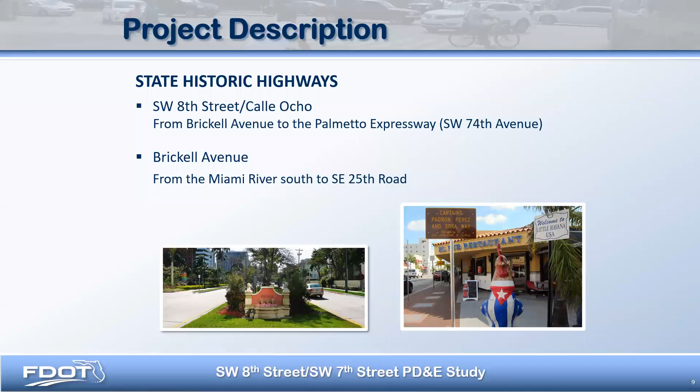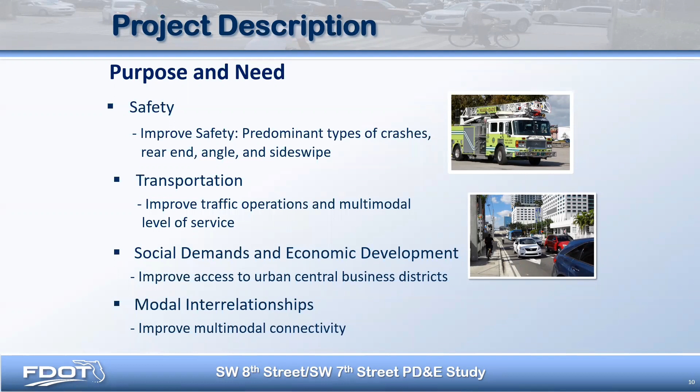So we evaluated several alternatives along the corridor along 7th and 8th. We focused on the arterial alternatives before the I-95, for obvious reasons - anything that happens on the arterial has an impact on access to I-95. So we evaluated a no-build alternative, transportation systems management and operations, and 8 build alternatives. Alternatives 1, 2, 2A, and 3 removed a travel lane for different purposes.

We looked at alternative 1, for example, a two-way in which both 7th and 8th Street will be converted to two-way traffic with one center travel lane, one center turn lane, dual turn lane. Alternative 2 was also two-way traffic on both 7th and 8th.

However, the third travel lane was evaluated as a transit-only lane. Alternative 2A, again, a two-way, but that third lane was repurposed for a buffer bike lane. Alternative 3 was a two-lane, however, it's a one-way alternative, so it maintains the existing one-way pairs. However, the third travel lane was being repurposed for a bicycle lane.

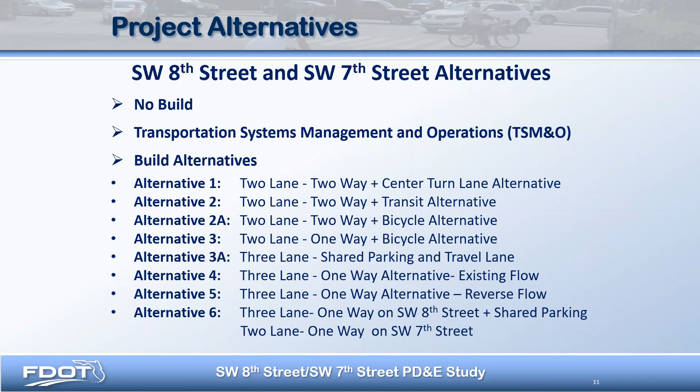Alternative 4 maintains the existing configuration with 3 lanes eastbound on 8th Street and 3 lanes westbound on 7th Street. It does, however, include improvements at I-95. So there are no impacts along 8th Street, as we'll be maintaining the existing configuration.

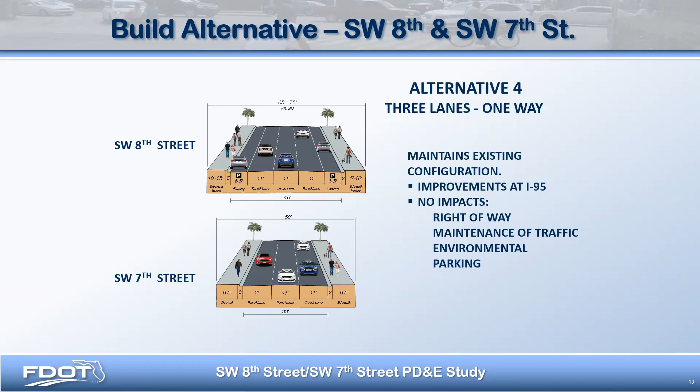While we have certainly more on 8th Street, we have approximately 25 to 30% canopy coverage along the street. 7th Street is more limiting because the sidewalk and right-of-way are more restrictive, but we do have some canopy there that we're at least able to preserve. When we get to the Brickell slide, the interchange slide, we'll talk about that.

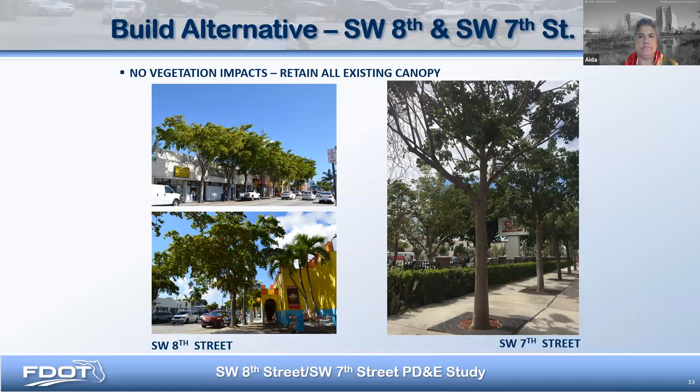Once we had a preferred alternative for the arterial, we focused on the I-95 alternative, evaluating the no-build and build alternatives. The build alternatives are a combination of elements. For example, alternative B1 looked at an elevated off-ramp as well as an elevated on-ramp. Alternative B2 looked only at the on-ramp, and alternative B3 evaluated only the off-ramp. Alternatives B1 and B3 were determined non-viable due to constraints and the geometry for the off-ramp.

As you all know, that area is very urban, there's not a lot of right-of-way, so there were geometric concerns with the off-ramp and the ability to provide enough sight distance.

Alternative B4 was an at-grade solution that converted 3rd Avenue to one-way, to facilitate access to the on-ramps at Southwest 8th Street.

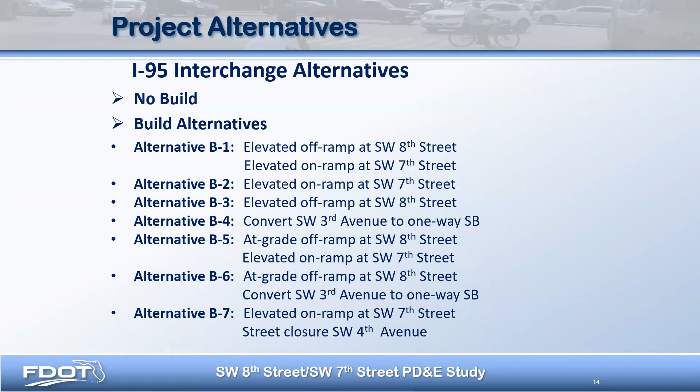So this is the preferred alternative for the project. As I mentioned, it includes that elevated on-ramp from westbound 7th Street to northbound I-95. It also includes the widening of the I-95 southbound off-ramp and closure of Southwest 4th Avenue at 7th Street. Southwest 4th Avenue is a City of Miami jurisdiction, so we did extensive coordination with the City of Miami, as well as Miami-Dade Department of Transportation and Public Works, and they have both provided a letter of support for the closure of 4th Avenue. This alternative also includes converting 4th Avenue and 3rd Avenue to two-way between 6th Street and 7th Street, to facilitate access to the I-95 on-ramps at 8th Street and 7th Street.

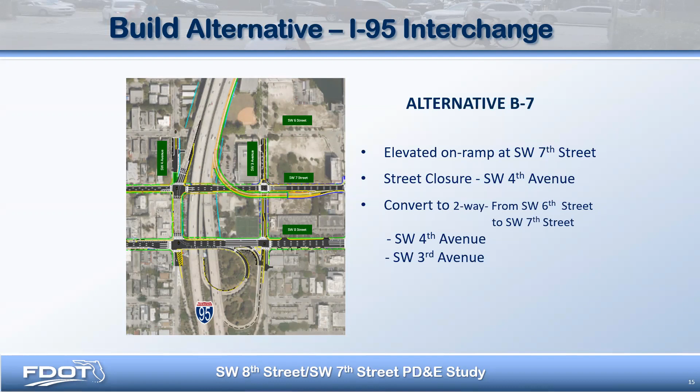Next slide. Thank you, Vilma. As Vilma stated, with the limited right-of-way and limited options, one of the wonderful benefits for the project is that there will be very minimal vegetation impact. These interchanges and ramps are very densely vegetated, so we will be able to maintain as much of the canopy as possible. The clearances may require maybe 1 or 2 trees, depending on the clear zones, but that will be determined in the final engineering plans. Thank you.

Next slide. This is showing a rendering of the proposed on-ramp. We'll be providing sidewalks on both sides - there's existing sidewalk on the north side, and we'll be providing sidewalk as well on the south side. Next slide.

In terms of the project schedule, we're looking to hold a public hearing in November of this year. We'll also cover the State Historic Highway designation, as well as present the closure of Southwest 4th Avenue. We anticipate location and design concept acceptance in May of next year, and design to begin in late December of '22.

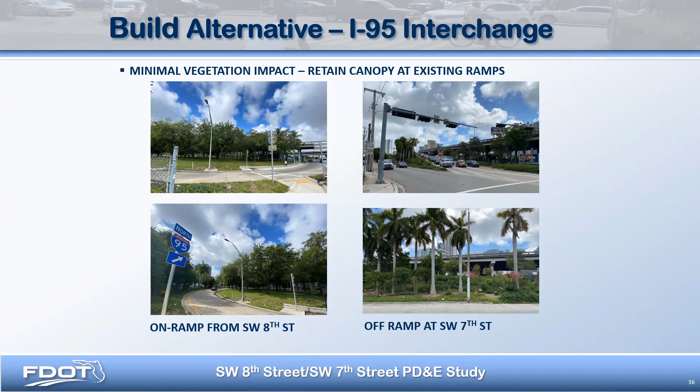So is that Publix on the right there? It looks that way, yes. Okay, the orange building, that's Publix. And the new sidewalk is across the street. Correct. Okay, that's a vacant property right now.

Right, so actually Steve made me think about something. There's always been talk about making these roads two-way instead of just a one-way pair. So this new ramp would almost preclude that from happening. Is that correct?

Well, we did look at all those build alternatives. As I mentioned before, we looked at the two-way, we looked at the reverse. A lot of the stakeholders, both business owners and residents, saw that turning it into two-way would pretty much require reconstruction. And at the end of the day, they didn't really see a benefit in terms of their business or the residents. So to convert it to two-way would require new signalization and, again, a lot of reconstruction for what was in their eyes not seeing as any additional benefit.

Right, it's good urbanism to do. Yeah, so anyway, all right. Any other questions or comments? I have a quick question for Ada Curtis.

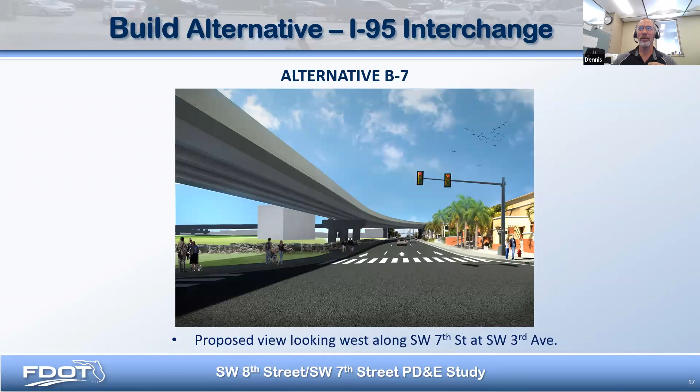Okay, anything else? I just wanted to ask if you could hear me, if I got my mute fixed. You're fine. Oh yeah, perfect. Thank you for that. David, can you hear me? Yes. Yep, okay.

It's been difficult to absorb the project because on the one hand, I'm looking for a Southwest 8th Street improvement all the way from Brickell to the Palmetto. So the title or something is extremely confusing. And then bottom line, we're looking at a ramp. So I feel either the title of the project should be changed or we should see the entire project. We're just being given a very narrow little scope of, this is what we're doing here.

So I don't know, is there something in the project in its totality that we're not seeing, or is it coming to us later? Isn't this just the one-way portion of 8th Street and 7th Street?

The study did look at alternatives along 7th and 8th between 27th and Brickell. However, after evaluating 8 built alternatives, it was recommended to maintain the existing configuration. The study did evaluate the entire corridor, but the proposed improvements are just at the I-95 interchange. When the project moves to design, it will focus just on the interchange, so there are no proposed improvements along the arterial at this time. The reference to the Palmetto was about what's designated historic, not the entire study area, which is limited to 27th Avenue to Brickell.

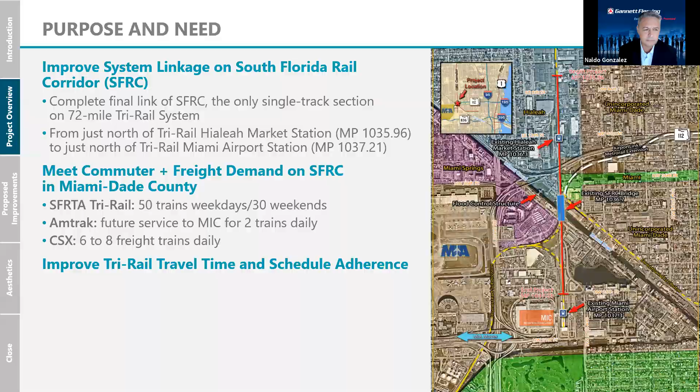The third item is to improve travel time for Tri-Rail and schedule adherence for CSX. Next slide — you can see the map there.

The last part is intermodal connectivity, at the Miami station at the far south end of the job, which is the Miami Airport station of Tri-Rail. It provides connection to Miami-Dade Transit buses, the Metro Rail, and the Greyhound. Eventually Amtrak will also go down to the Miami station, and of course it connects to Miami International Airport.

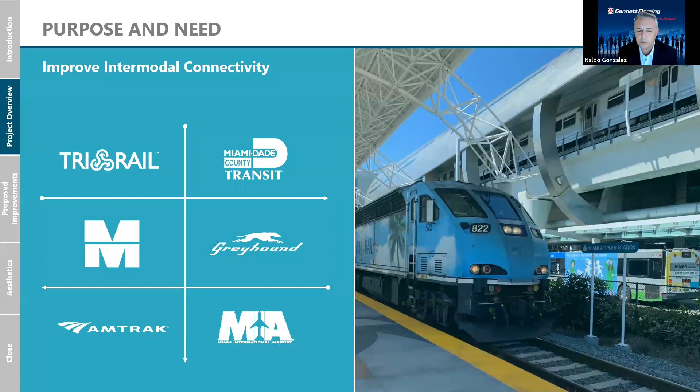Next slide. The existing corridor is a single track. It goes from just north of the Miami station, around Northwest 28th Street, to just north of Northwest 46th Street, in the area of Hialeah. The right-of-way is about 50 to 80 feet, and the land use area is predominantly industrial.

Have you ever been out there? There are seven crossings along the project limits — two spurs, the downtown and the Homestead, mainly for CSX, and two historic sidings that provide direct rail access connections to two properties along the corridor.

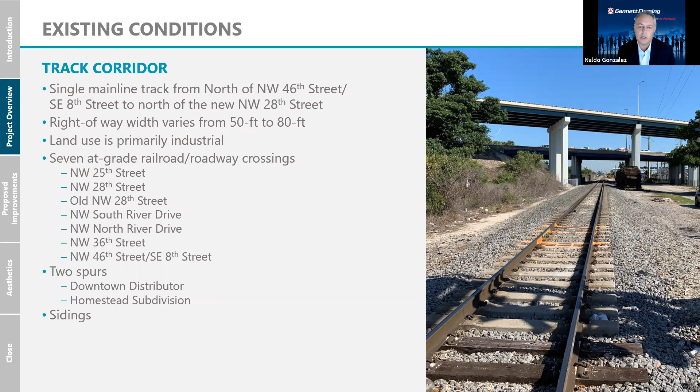Next slide. These are some other existing conditions we're contending with. The existing Hialeah Market Station, which will be improved, is just south of the Hialeah Seaboard Air Line Railway Station — the original station, just north of the existing one, which is historic. We won't be touching it, but you should be aware of that constraint.

The other constraint is the river crossing — a single bascule bridge, which I'll speak to further. It's eligible for listing on the National Register of Historic Places, and openings are very limited; there's no boat traffic out there, but they do open it for maintenance. We also have a couple of overhead structures, including Northwest 36th Street and State Road 112, the Airport Expressway, and the Metro Rail at the Earlington Heights leg, which was constructed a few years ago. Next slide.

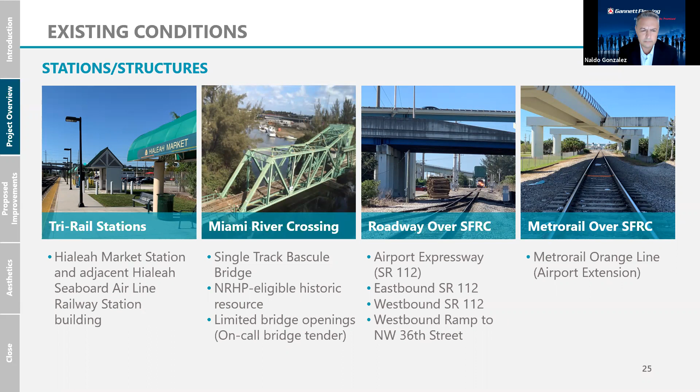The main issues on the job, when we looked at it from a design standpoint after taking over the project from PD&E, fall into three buckets. The first and biggest hurdle was navigational rights. That portion of the Miami River is dedicated for navigation through a federal project canal, and in order to get a fixed bridge we needed a deauthorization — that required literally an act of Congress, which we were successful in getting back in December. Working with SFRTA and FDOT, we got the US Congress to pass a bill that included the deauthorization of that portion of the canal, allowing us to proceed with a fixed bridge.

It requires some coordination with some permitting agencies, and we do need to compensate the property owners for riparian rights. The second bucket of items we deal with is capacity improvements, the replacement of the bridge.

How do we do that? How do we maintain traffic? The special track work, the signals are being upgraded. The PTC, positive train control safety features, we're improving it. And then the maintenance, how do we maintain traffic for CSX and Tri-Rail while we're building this thing? And of course, safety and security is important on the job as well, which is part of our scope.

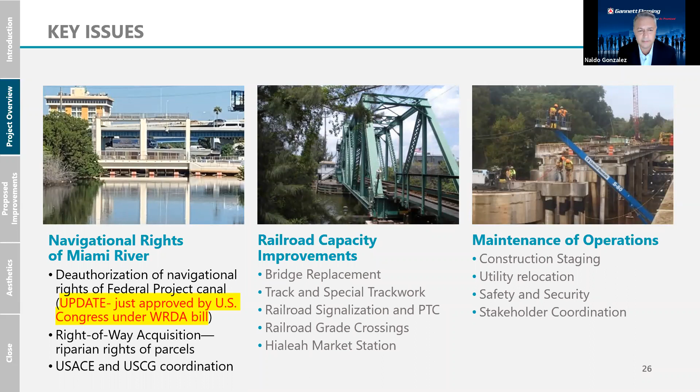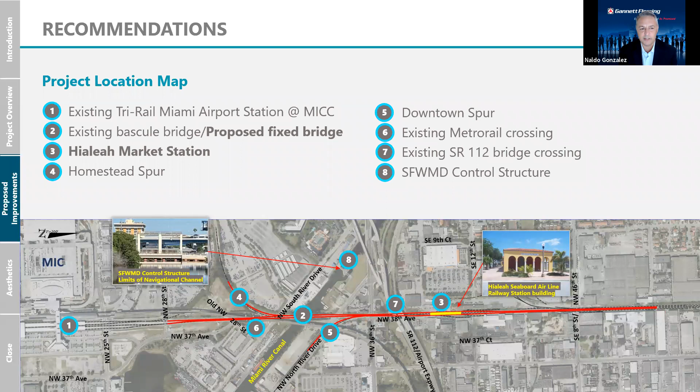Like Minot said, there was a PD&E study done by SFRTA between 2013 and 2018. It included a Section 4(f) evaluation, Section 106, especially for the historic features, and it ended up being a finding of no significant impact. They gave recommendations for alternatives for the tracks, the bridge, and the station, and it also included some preliminary design work.

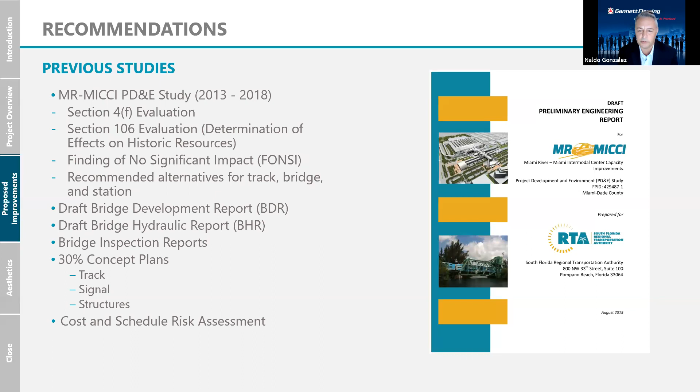These are the recommendations from the PD&E, which eventually comes into our design. Obviously, a 2-track system.

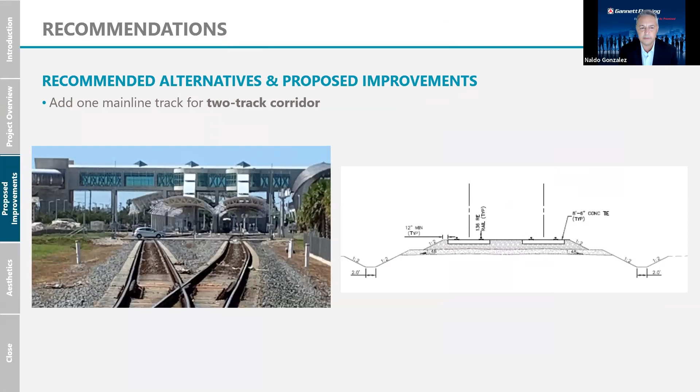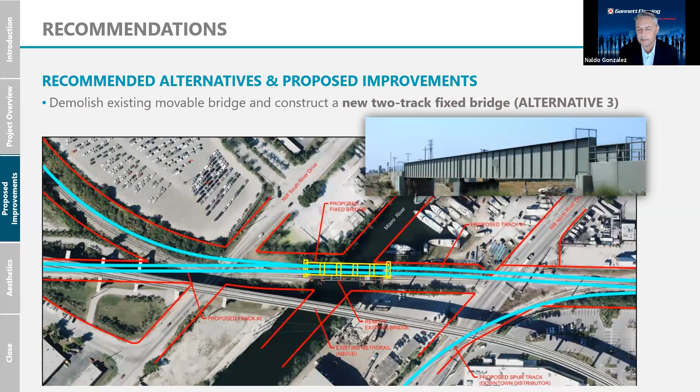The replacement of the existing bascule bridge, a movable bridge, with a fixed bridge. You can see it's just to the west, and I'll explain the reason for that. It's just to the west of the existing bridge, and that's a picture of what the new one's going to look like. It's a fixed steel bridge, and I'll talk about that in a few minutes. That's the preferred alternative.

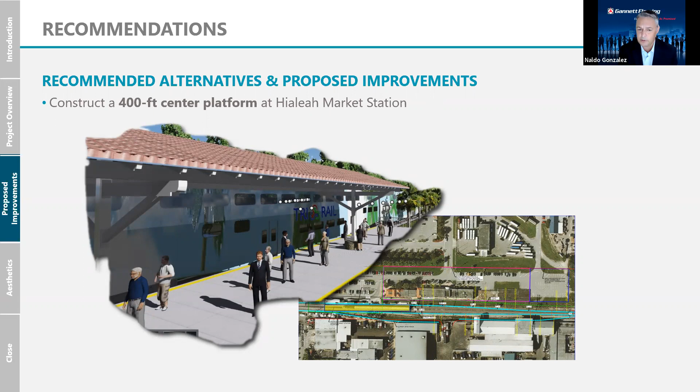The station, which we'll talk about, is a center platform station. The existing station is a side platform on the west side of the existing single track. The new improvements with double tracking will have a center platform. This was a recommendation we evaluated, and it's a recommendation from SFRTA's executive committee. This station probably has the least ridership, and this is what they recommended and approved at their executive level.

These improvements, again, the crossings are going to be all upgraded with different concrete ties, asphalt. We'll be improving the profiles along the crossings for the roadways. The signal pictures on the left are the existing signals. We are improving these railroad signals, and the crossings will be upgraded with new gates.

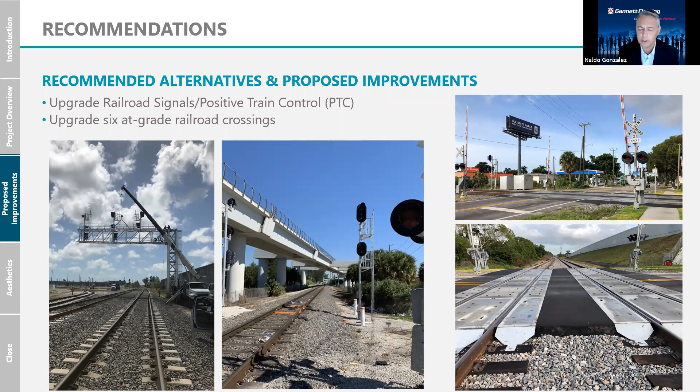As Beno said, the PD&E had a commitment to meet and coordinate and get approval from TARC, as well as other PD&E commitments that we need to adhere to as part of our design, and we're tracking that.

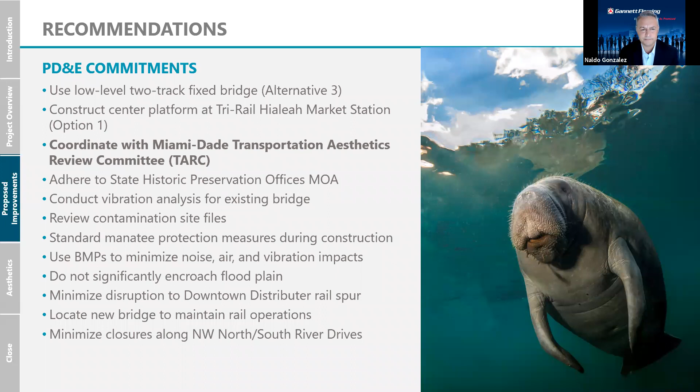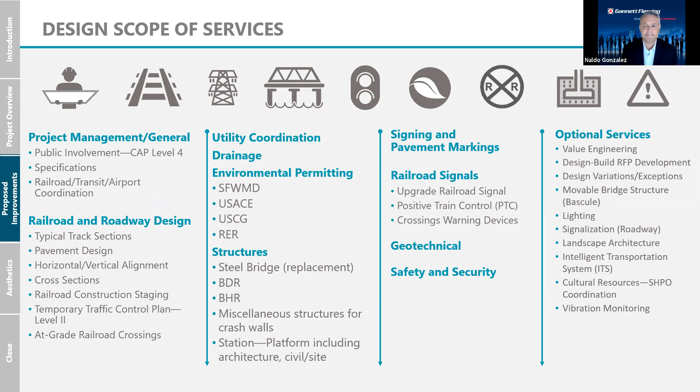Again, just a double tracking. We're fixing the crossings, the stations, all the work, mainline track. There's ballast, and there's quite a bit of drainage work on the sides where we have swales along the side of the track.

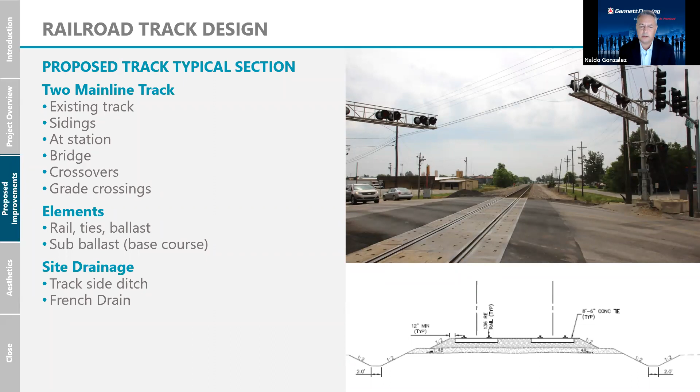So now we're in design. This is the design of the project. We started the project back in 2019, and we developed several typical sections that have been approved by FDOT, as well as CSX and SFRTA. This is the main typical section for the corridor, a 2-track system with side walkways. The level area is for maintenance, a side area for maintaining the tracks required by SFRTA. So this is the majority of the corridor, which will be a double track like you see here.

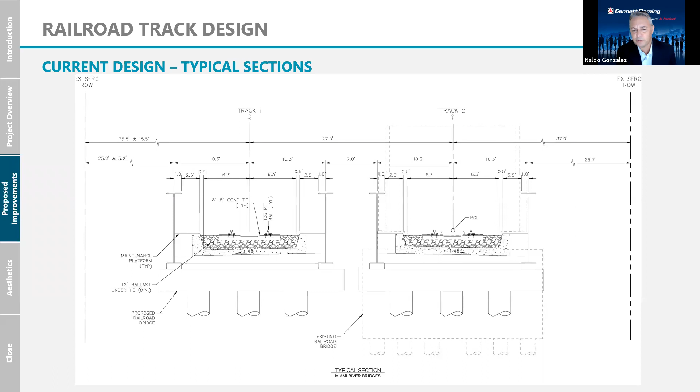This is the typical section at the bridge. There are 2 bridges, twin bridges, one for each track. The west bridge will be constructed first, so we can build it separate from the existing one and maintain traffic on the existing bridge. Then when that's completed, we switch traffic over to the west bridge, demolish the existing bascule bridge, and construct the east bridge.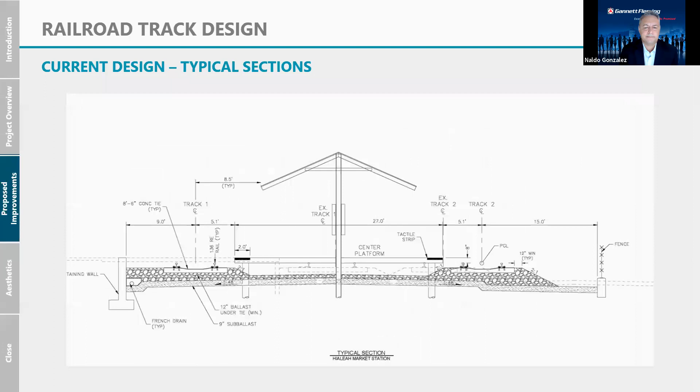This is really a tie-in point, whether we tie into a double track or a 4-track system. This is one more typical section.

The existing bridge was built in 1926. It's called a single leaf Scherzer rolling lift, really historic. It's about 196 feet in total length and spans the majority of the navigational channel, 55 feet. It's in fair condition structurally, but in poor condition mechanically. It takes quite an effort to open the bridge, which is only done for maintenance purposes, since there are no vessels in the area for the most part.

So we're looking to replace it.

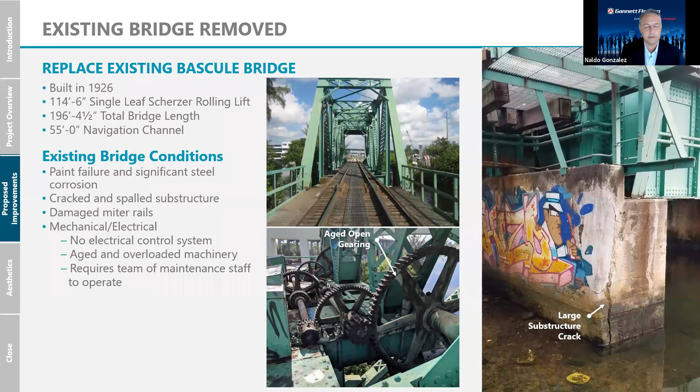The bridge is listed, or eligible to be listed, on the National Register of Historic Places. As such, during the PD&E, FDOT or SFRTA coordinated with SHPO, the State Historic Preservation Office, along with FTA as the leading federal agency. They came up with an MOA, which includes several stipulations, among them documentation of the historic bridge, as well as markers and recognition somewhere on site or within the corridor, most likely within the station. So we have some context and history of the project, but these are stipulations in the signed MOA.

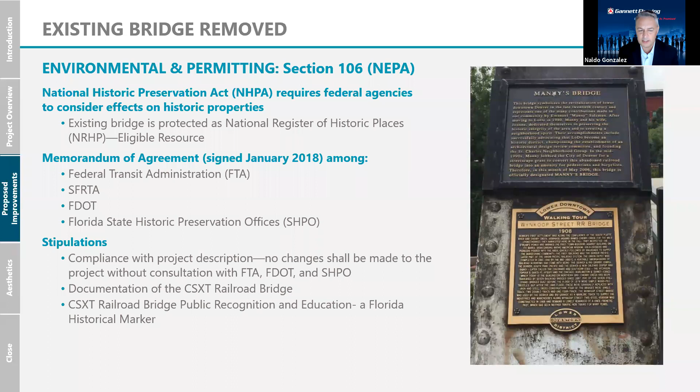So this is the proposed bridge. I'll run through this quickly. These are two single bridges in parallel. They're actually going to be precast, not cast in place.

Pier caps sit on 48-inch drilled shafts, but the caps are rounded for a couple of reasons—especially the ones in the water—one for vessel impact protection, but also from an aesthetic perspective with the rounded corners, which you see on the intermediate bents. The superstructure is what's called steel through girders, simple spans, a two-span structure as you see there. The webs are approximately 10 feet tall, which works out well because it hides away the tracks and the decks that sit on top of the structure.

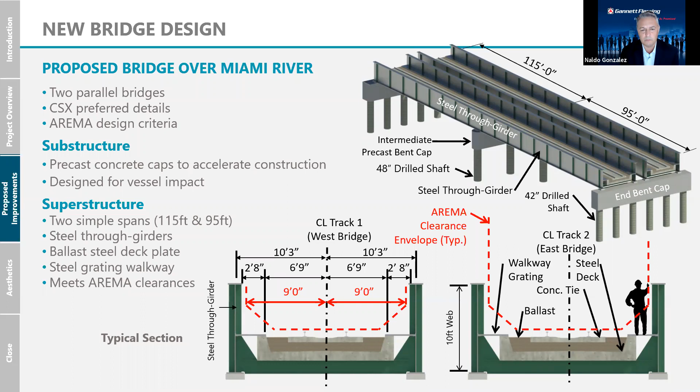On this slide, I won't go through all the items on the left, but on the right you can see in magenta the foundations of the existing bridge in the canal today. Our design is much cleaner, perpendicular to the tracks. We only have one set of foundations for each bridge, and a set of intermediate bents in the canal, so it's a much more efficient, clean design in the water and for the superstructure.

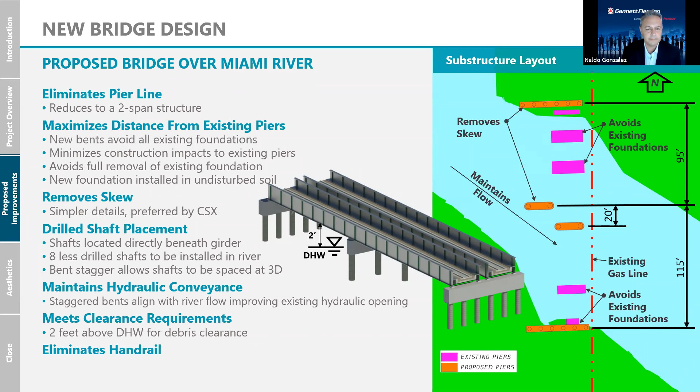These are details of the pier cap. You see its rounded edges, which make it look nicer and also help if any vessels come near the bridge, which is a low-level bridge—about 2 feet above mean high water, but about 6 feet above average water. So the clearance between the average water level in the canal and the bottom of the structure is about 6 feet, which is more or less what exists now.

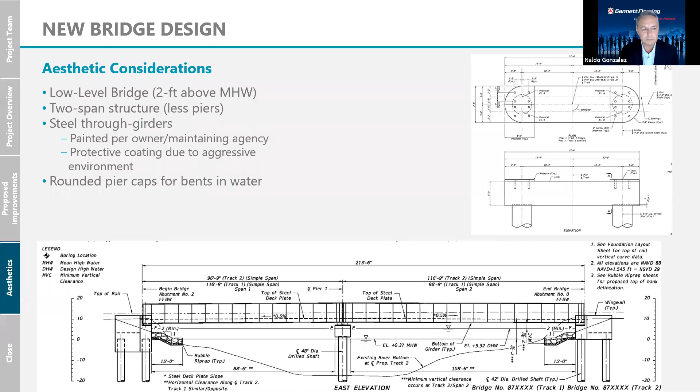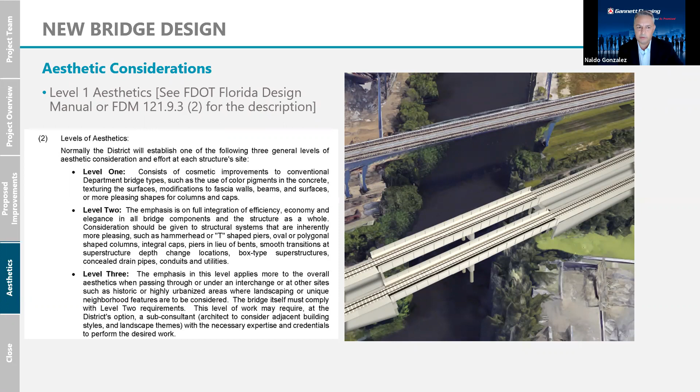This is kind of a view of it, a rendering of how the bridge is going to look. The bridge is shown at level 1 aesthetics, but I want to make sure, we're doing a lot of elements of level 2 as well. The rounded pier caps, the steel through bridge, covers a lot of the area. So a lot of the elements of the bridge really cover the level 2 aesthetics, at least for FDOT's guidelines. These guidelines are more for FDOT roadway bridges, but we're applying a lot of the elements of level 2 to the bridge.

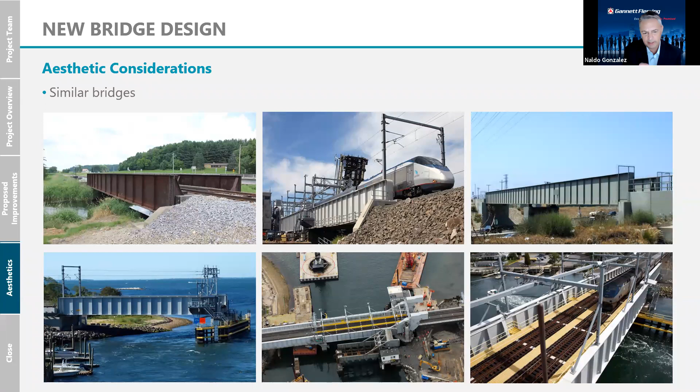This is what the final product looks like. We're working with the maintaining agency, SFRTA, as far as the color, but these are steel through girders. You see on the left, it's more of a weathered steel look, and then the other ones show different colors, whether green or light purple-blue, which SFRTA has said they like, powder blue being one color they're considering. More or less, that's what it's going to look like from the side and from top. The center picture in yellow is a bascule bridge, and right to the left of that is the fixed portion. That's what it will look like from top at the end of the day.

So with that, I'll hand it off to Tanya or Dennis to cover the station.

Hi, this is Tanya Reineman from Gannett Fleming. I'm the civil site engineer for this portion of the project. This is the Hialeah Market Station. On the left side of the top picture, you can see the historic building that is remaining in place. To the right is the portion of the project we're improving. The existing station or platform right now serves the bus and the track. From the existing platform, we're going to be removing from the back of the curb the whole way across to the right of the picture to improve the site.

So we'll be removing all the site amenities, which include 5 canopies, ticket and vending machines, existing electrical and communication lines under the site, existing bike racks, storage units, and benches that we'll be removing as part of this project.

Below, in the center platform plan view, you can see the improved site. I forgot to also highlight that we're reconfiguring the site as shown below, and that during this process we will be closing the station temporarily to reconstruct and add track 1 and track 2 at the center platform. The center platform is 400 feet long. It will be a precast concrete platform with a 17-foot wide canopy and a standing seam metal roof. As you can see, the center platform is highlighted in light blue color. Track 1 and track 2 run parallel to the center platform.

All right, finally back. If you could back up to this previous slide, I just wanted to note the construction of the platform.

The actual canopy, early in design, we were guided to follow the design of the Pompano Beach canopy station. The columns configuration is slightly different, and the roof system is now a standing seam roof system to keep consistency between the stations. The roof system in more of a red, like tile, is something we're recommending because it would draw a connection between the historic structure on the left and the new platform, while still having consistency with details, ease of design, and flow, as well as recognition.

for folks looking at the stations. It pops out pretty readily from afar that you're looking at a train station because the design is similar in shape and function. However, the colors we can blend in with the local areas for our recommendation.

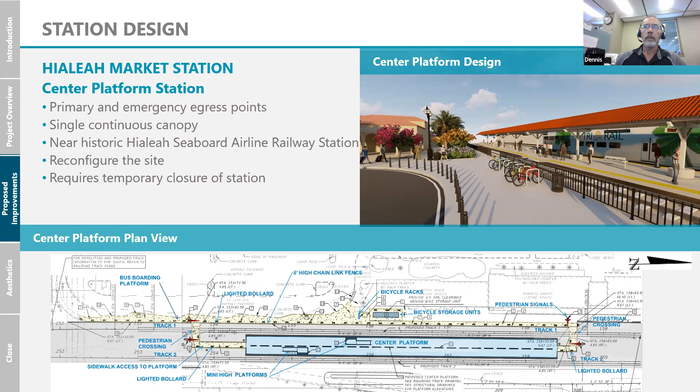Next slide, please. So on the upper left, we're looking at an elevation view of the entire platform, which shows the main means of egress on the south end, to the left side of your screen, and then the emergency means, which would be utilized on the right side if and when needed. What you can see from afar is we're using the FDOT and SFRTA standards for the bench amenities, waste receptacles, and signage, though the signage does not appear here.

Down below on the right-hand side is the Pompano Beach station, so you get a better look at what that would be like constructed, as far as the main structures are concerned, with the standing seam edge gutters that turn and drain internally. The downspouts come down by the main columns and then drain underneath the platform. Also highlighted there is the mini-high, providing ADA access, which we've put on the south side more because that's where the majority of the ridership is going to be coming and departing to.

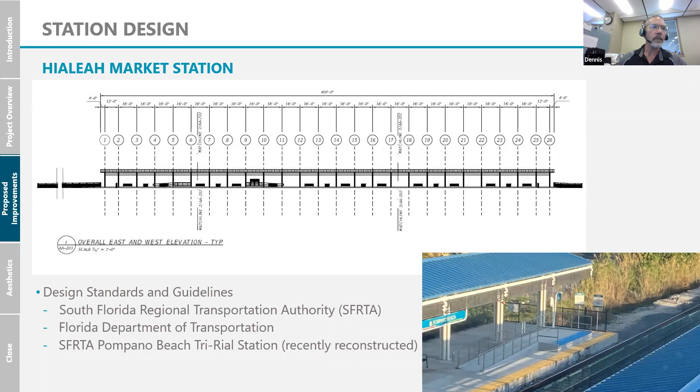Next slide, please. This is just details of the standard mini-high platform and what that would look like.

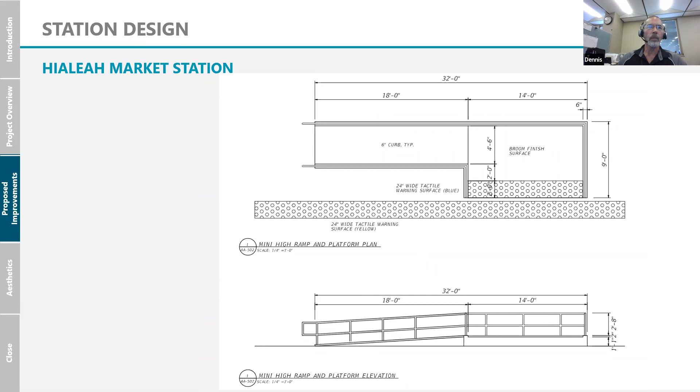Next slide. This is a typical cross section showing the precast platform, precast foundations, and the structure for the platform with the standing seam metal roof, ridge vents, gutters, and rain screens on either side to help add a little bit more protection for folks on the platform, as well as aid the drainage. The benefit of the precast is that we can construct this more quickly and try to decrease any downtime that's required.

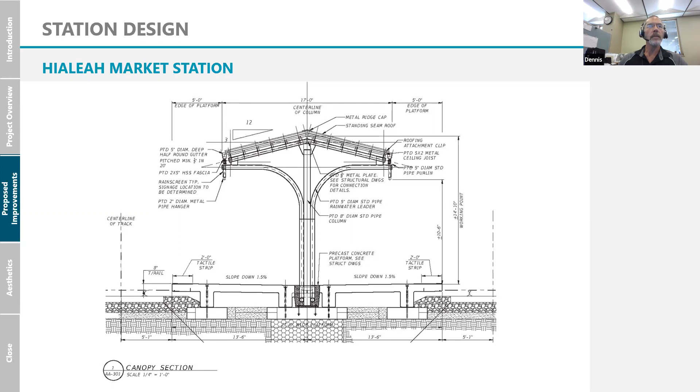Next slide, please. Here again are more samples from Pompano, which gives you a much clearer picture of what the anticipated end result for the canopy would be, as well as the mini-high.

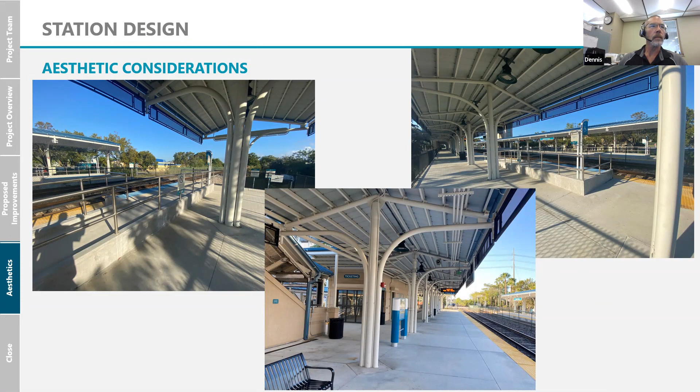Next slide. As far as amenities are concerned, we're planning to use the FDOT standards for the benches, upper left. We're reusing the ticket vending machines, which are currently on the bus portion of the station, so they'll be moved onto the platform. They will also be enclosed in a smaller, security-type structure with a roll-up door—when the platform's open, they can roll the door up, and when not in use, they can close it and secure it, keeping everything safe inside.

The waste receptacle to the right is standard FDOT, and what we're recommending in our design is to use a two-can system so that we can add waste and recycling at each station location for these receptacles. Continuing clockwise is a sample of the bike storage, off onto the bus side of the tracks, and standard railing, which will be used on the platform for the ingress and egress of passengers.

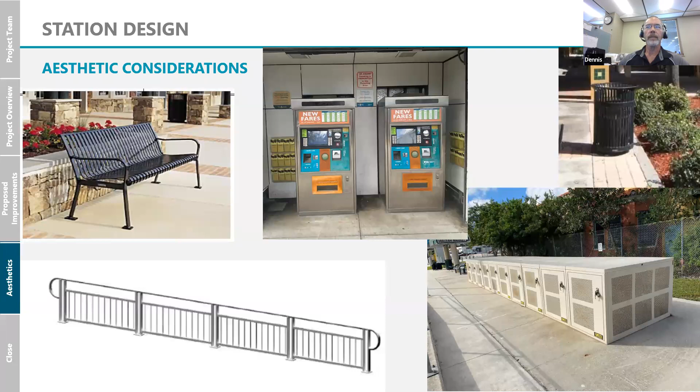Next slide. Here we have standard SFRTA signage that will be utilized on the site as well.

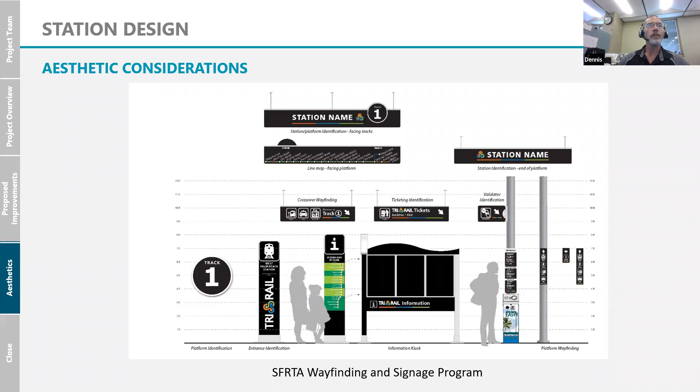Next slide. Last but not least, bollards we have are being used for lighting, and they will be utilized between segments of railing on both the bus side, where there'll be chain link fence separating the tracks from the bus portion, and also on the railings to and from the platform. The lighting you're looking at on the right is what's being specified for the underside of the platforms.

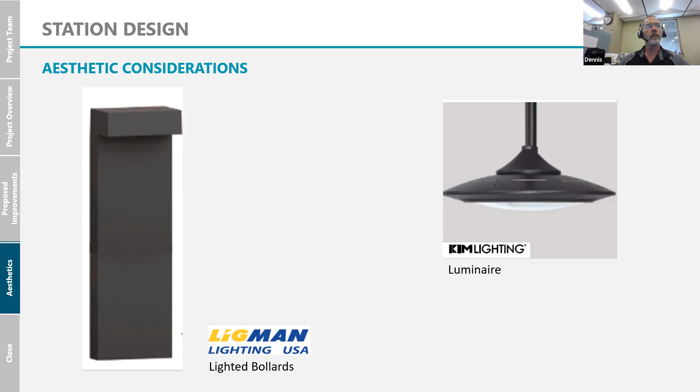Next slide. Okay, thank you, Dennis. Just to wrap it up, we will continue to coordinate with all the stakeholders, including the TPO and TARC—you see we have several of them to coordinate with. We have to adhere to SFOMA and the MOAs, and also work with SFRTA and CSX, which is also important in the corridor.

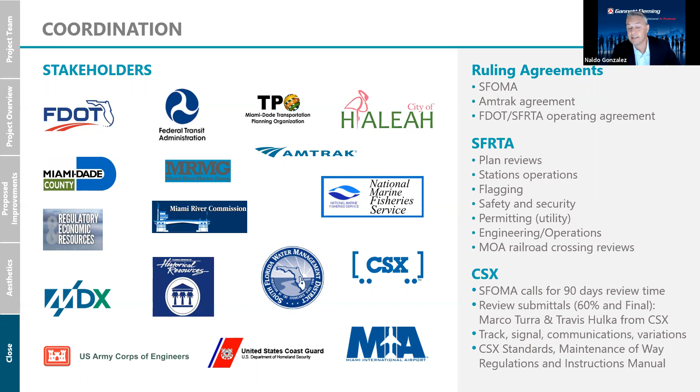Just the last thing to cover is the project schedule. We're more or less at constructability, which is 60% design. We started back in July of 2019.

Right now, the biggest duration is both right-of-way acquisition and permitting. That will take quite a bit of time.

Then we get until 90%, or biddability, which is September 2023. Right around that time is when we'll also have a public meeting. Production, which is design complete, is February 2024. And the letting of the project is currently scheduled for fiscal year 2025.

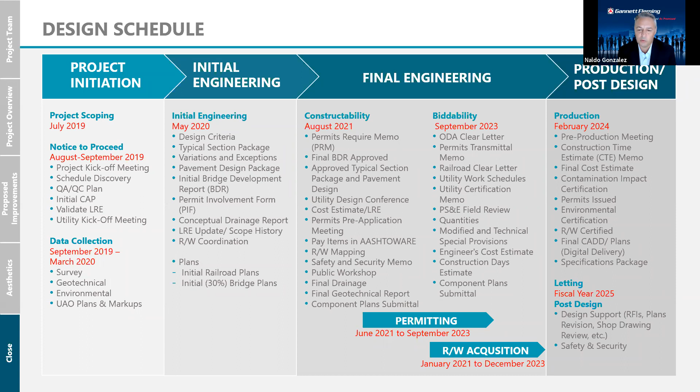Next slide, I think that's the last one. We're happy to answer any questions. I didn't include any contact information, Alex and Oscar, but we'll be more than happy to send that if needed.

Okay, thank you for your presentation. I'm going to turn it over to the other committee members for their questions, but you're letting this project in 2025 - so when would it be finally constructed and open?

If the letting is in 2025, we're estimating probably 30 months, so open would be 2027, 2028. Okay, thank you. Do any of the committee members want to start?

Yeah, I'll start off, Alex. I think for clear flow of comments, you really have two projects here, and we should address it particularly that way. You have the rail portion, let's say, and the bridge crossing - we should have one set of comments and go through everybody on that. And then we have a second project, which is the improvements to the existing station.

Yep, what is your preference? Where would you like to start? I mean, that's fine, they are, in my mind, two separate projects. So yeah, go right ahead. Start with the actual bridge project.